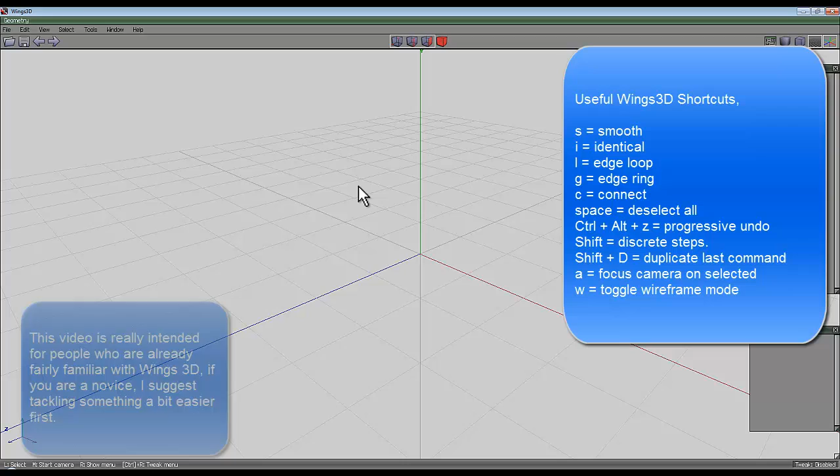So this is going to be a reprise of an earlier idea, this one. So it's going to be one of these interlocking Mobius shapes, and I can't really adequately explain why I find them so interesting, but I do. So that's what we're going to do.

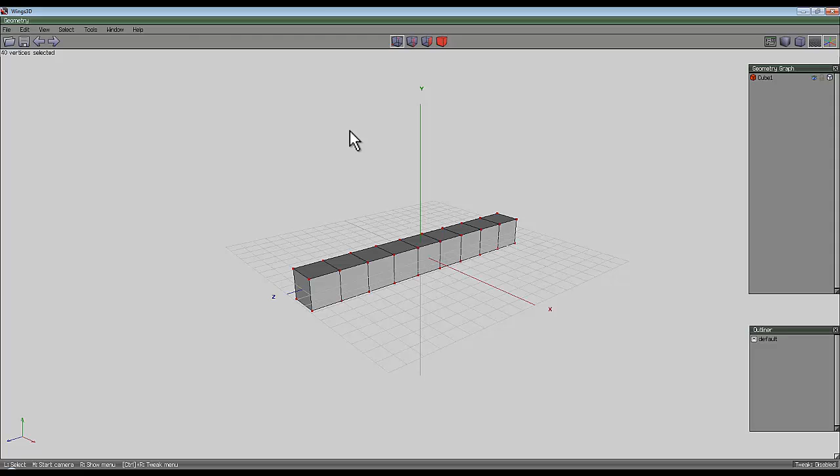Right, I'm going to select each side of this and mirror it, and what I'm going to do is create a rod, and we're going to use the bend command to create the shape instead. So create yourself a rod, select the entire object, select the vertexes, and then right click, deform, and I'm going to twist it along its z-axis. So I need to twist it a specific amount, so I hit tab and enter 90 degrees. So I've put a 90-degree twist in this.

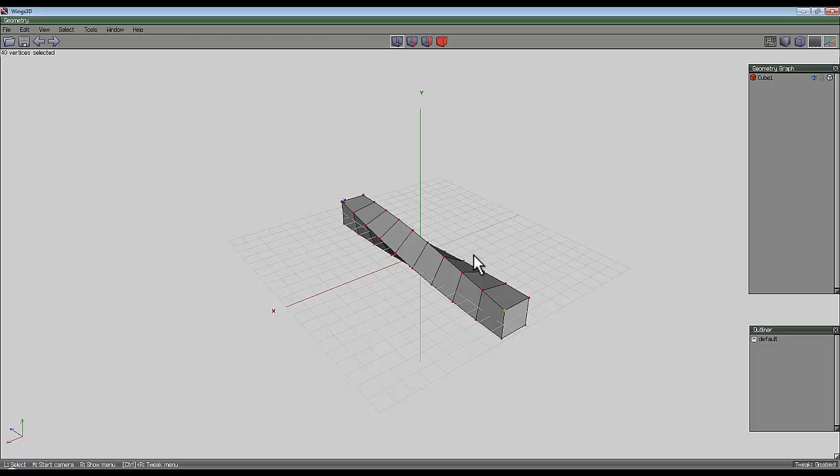The next challenge then is to bend this so that these two faces line up exactly. Right, I've got the orientation in terms of the twist fine, so they're going to match in that respect. So the next thing to do is to make it into a ring. So if I go to the right click and bend command, I select this edge here as being the rod center, and then I select the rod end after I've confirmed that with a right click. So it's now asking me for the rod top. So the instructions appear in this left hand corner, so select that and right click, and then finally the normal.

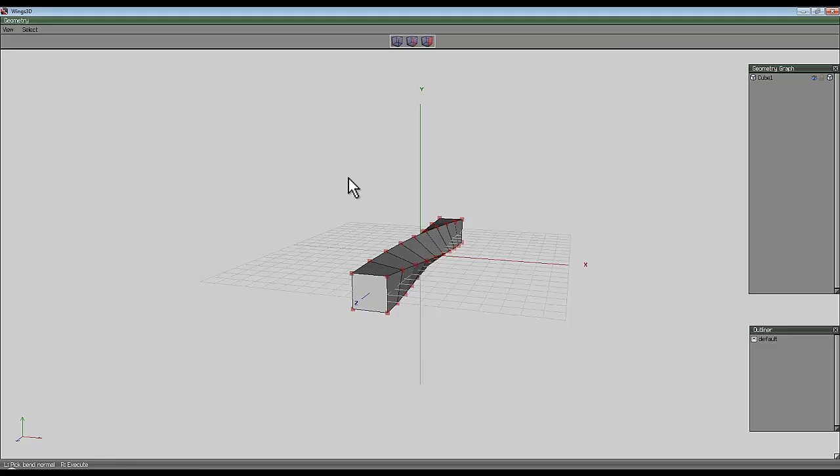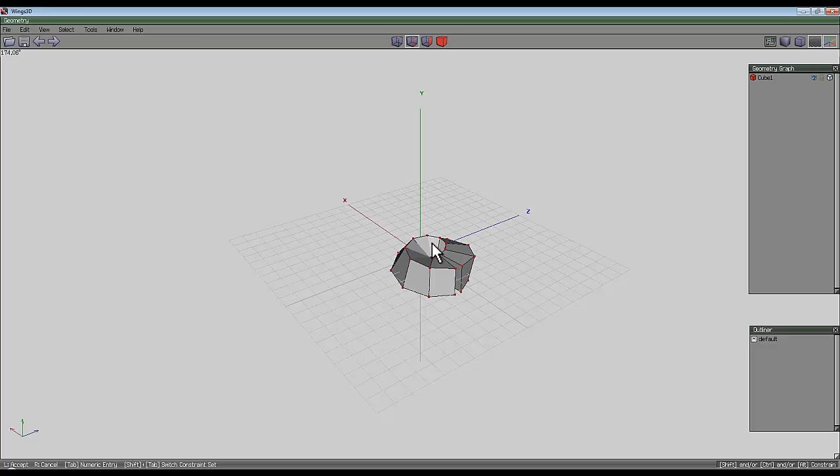To achieve this, I'm going to select this edge, and you can see the normal lines pointing that way. So what I'm going to do is select the other edge opposite, and that'll place the normal at 90 degrees to that. So if I just rotate round, you can see it's pointing out that way. So right click to confirm that, and in this direction it's going a bit small. So on this side, because of the position of the initial rod center, it's compressing it, and this one it's making appropriate shape. So I'll look in the top left hand corner, that's a minus 180 degrees will be my appropriate setting for that. So tab minus 180 to give me exact results.

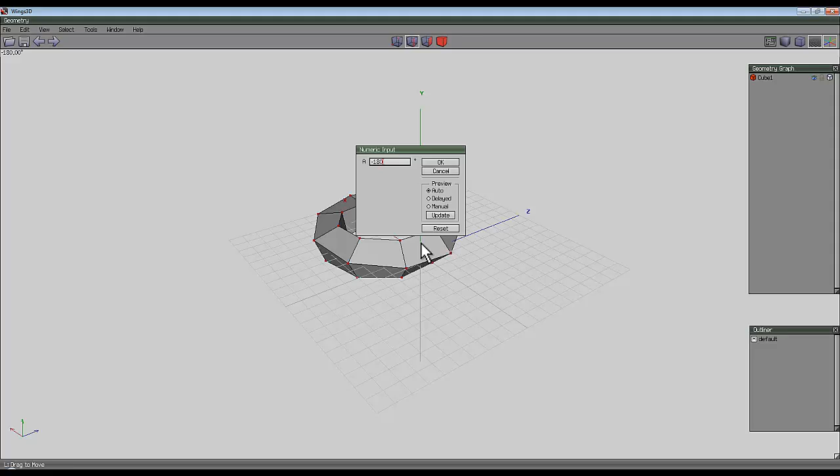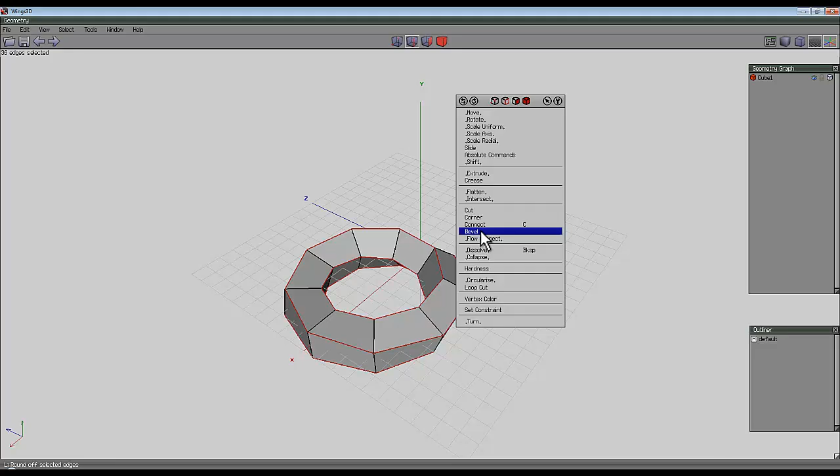Select the entire object, right click and weld, and it should weld those four corners together and they line up. So the faces have been welded together. Now it's a matter of following the process. So if I select one of these edges here and press L for loop, you can see that it's looped all the way around the outside. Right click and bevel. I'll just bevel it an arbitrary amount. Right click and extrude, normal. So just extrude it like so, again an arbitrary amount, and then I shall use shell extrude, normal, and create a strip that's going to run around the outside, and it's a separate object.

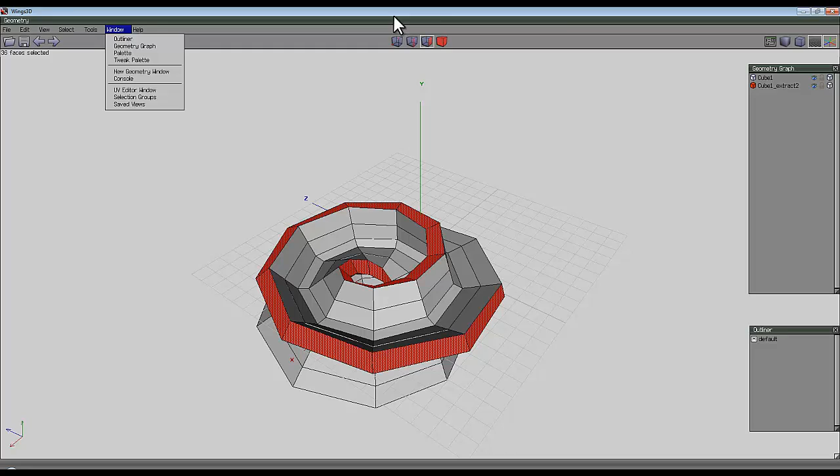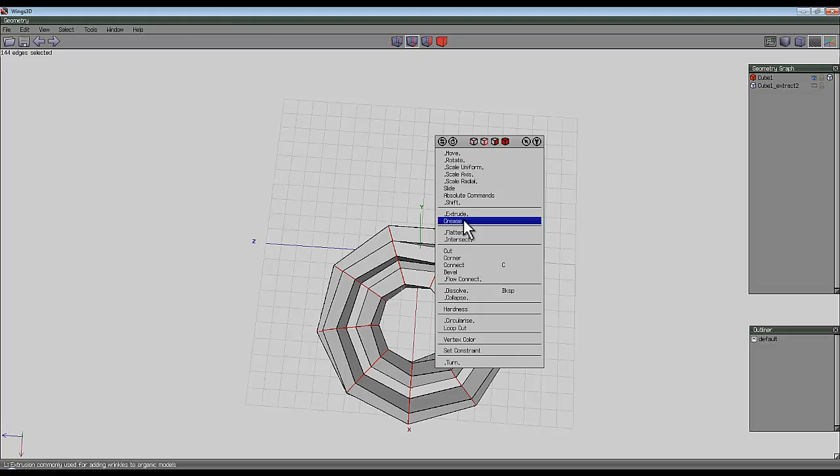If you can't see the geometry graph, go to Window and click on Geometry Graph. I'm going to use the geometry graph to hide the new bit and just work on this old bit. So select the edge tool, select one of these edges and press G to take it all around the shape, and then L for loop, and just keep pressing L until it's chopped all these segments up, so that this can now be separated using the loop cut command, and just run your mouse around. You can see you've got separate segments.

So at this point what I'm going to do is get rid of some of these bits of cross section. I'll do this by selecting individual faces, so like that one, that one, that one, that one, working my way around the shape, just completing it with every other one. So it's a little bit of a fiddly process, but you'll see the results in a few seconds. That's why I didn't create too many elements in this, because it can be quite time consuming otherwise if you're taking this approach. There are other approaches you can take.

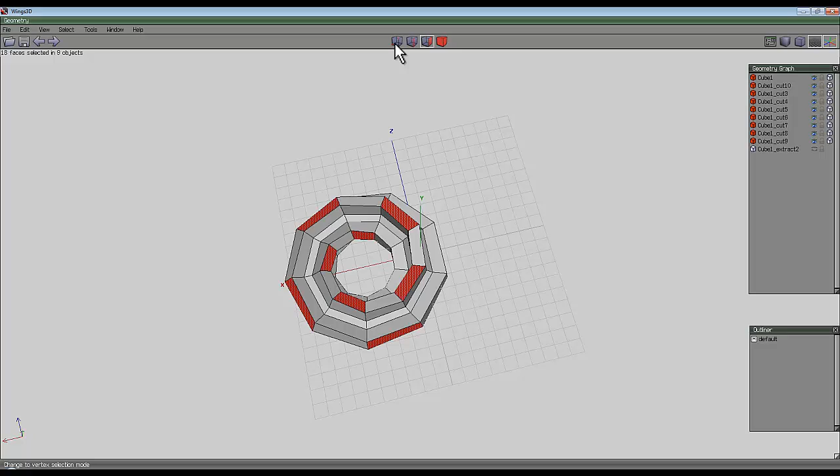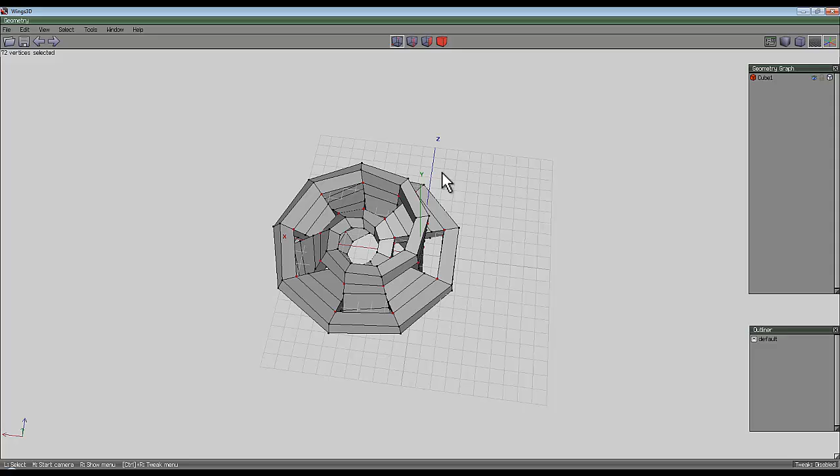Right, so if I now change this to the vertex tool and go plus and hit delete, I now have all these separate bits, which is fine, and then I can bring in my original selection, select the entire object and weld it together, so it should join up in all those places. And now if I select the entire object and use smooth, I can tidy it up a bit and make it look nice for rendering.

So there you go, a fairly swift process to create one of these shapes, and a little bit different in that it uses the bend command and starts with a rod.